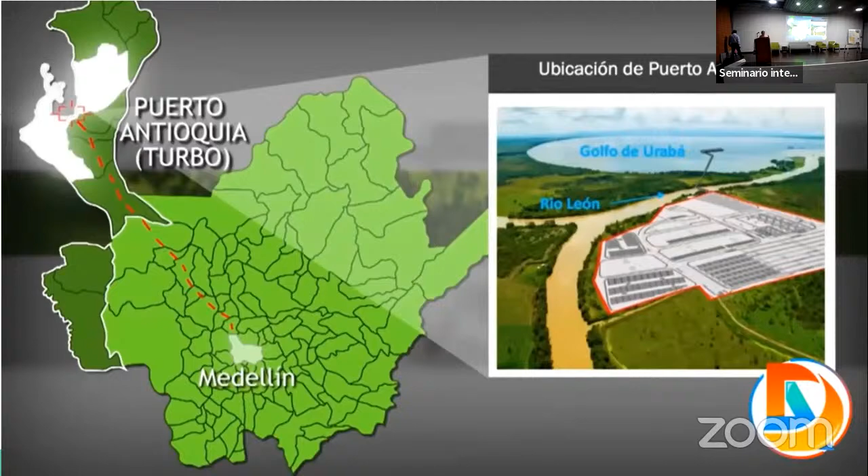Continuing with the location of Medellín, the Aburrá Valley. This is Antioquia, this is the Aburrá Valley.

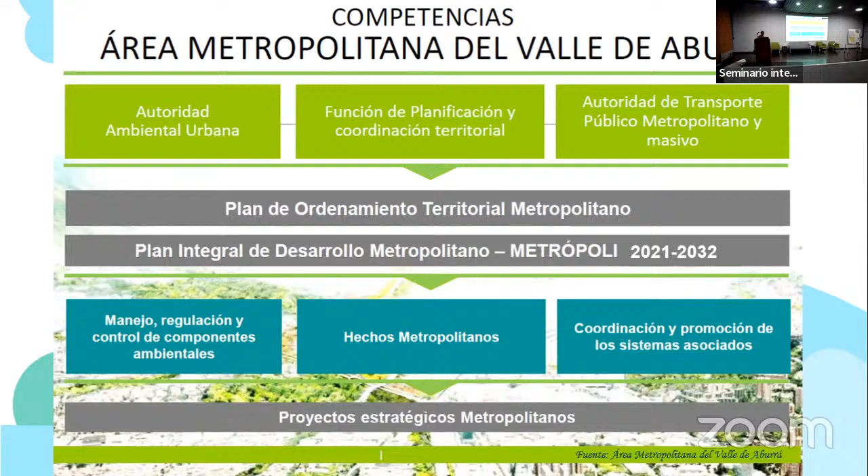The metropolitan area is also responsible for formulating strategic metropolitan projects such as the lines of Metro Medellín, which operates across different municipalities, with communication between different buildings and airports. The localization of Medellín and its metropolitan area is between different valleys.

We find the Cauca Valley in the west of the department, with an approximate altitude of 500 meters above sea level; the Aburrá Valley with an approximate altitude of 1,600 meters above sea level; and the San Nicolás Valley to the east with an average altitude of 2,000 meters above sea level.

An important fact here is that the Aburrá Valley spans only about 7 kilometers wide in the municipality of Medellín. They have the urban zone, suburban zone, and rural zone.

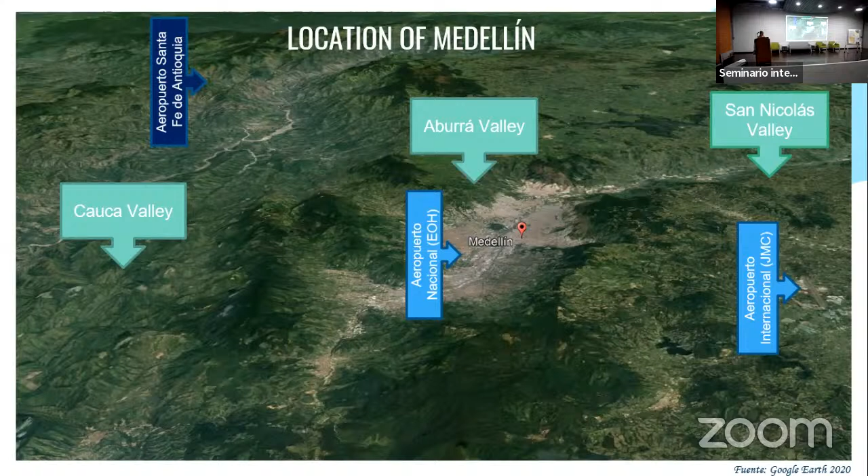In 1921, migration began from the rural area of Santa Fe de Antioquia, in the west, to what would become the new capital of the department of Antioquia, named Medellín. At that time, the population was approximately 90,000 inhabitants.

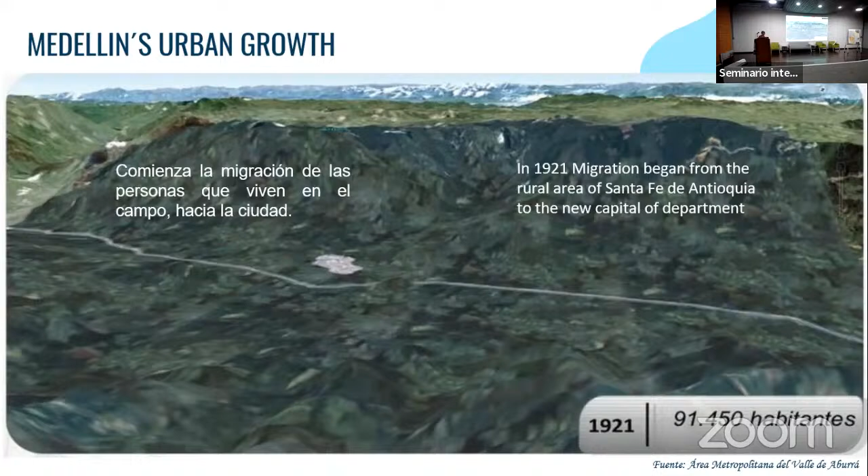In 1945, there was indiscriminate and unplanned growth due to the establishment of industry, increasing the population to approximately 270,000 inhabitants.

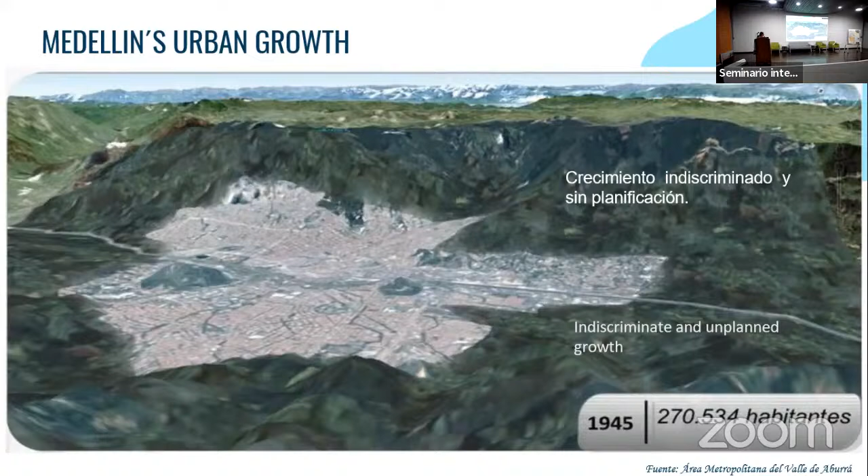In 1981, the population of Medellín had grown to approximately 1 million people, making it a sprawling city. In 1985, construction of Metro de Medellín began.

The first metro line was inaugurated in 1996, followed by the second line, which supports mobility in the western part of the city.

An interesting fact is that the metro system in Medellín is elevated, at ground level, because when construction began in 1985, Colombia was experiencing the drug trafficking war. If you know the story, you know who Pablo Escobar was, known as El Patrón. At the time, one of his tactics was to place bombs in the city. The system planners thought that if a bomb were placed in an underground system, it would be harder to evacuate or provide aid compared to an elevated system.

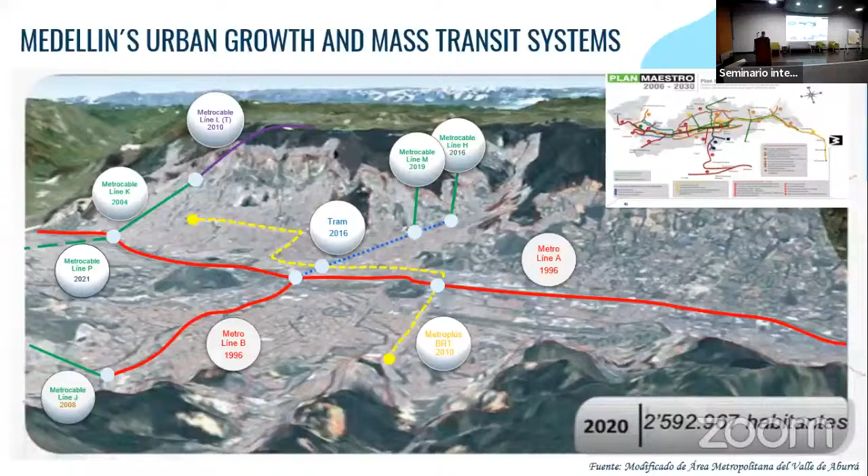The master plan for the metro system projects from 2006 to 2030, with many other projects planned for the future to improve sustainable mobility, reduce the use of private vehicles, decrease CO2 emissions, combat global warming, and improve air quality conditions. This is documented in another plan, Bio 2030.

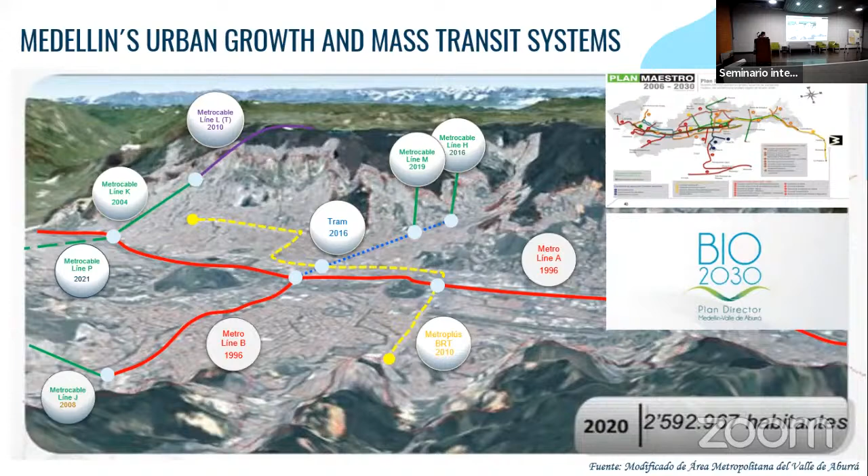The Medellín metro system transports 850,000 people daily, and the integrated system, Sistema Integrado de Transporte del Valle de Aburrá (SITVA), transports more than 1.2 million people daily.

The metropolitan area is divided into zones served by intermunicipal public transport routes. These routes are identified by different colors, each associated with the zone from which the population is transported, helping people take the correct routes according to their location. These vehicles are small, around 40 passengers, due to the road conditions and high slopes.

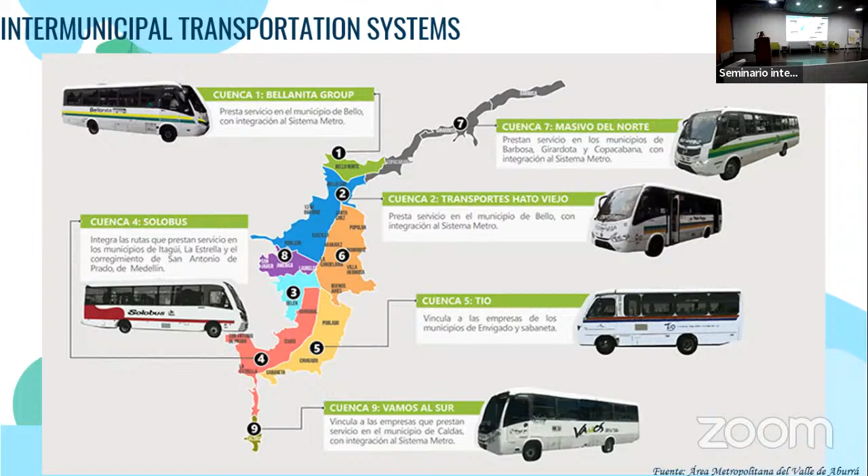Medellín and the metro system have saved more than 2.9 trillion pesos annually, equivalent to $900 million, by reducing pollution emissions, approximately 620,000 tons of CO2, in addition to fuel savings and reduced road incidents. In Medellín, 200 people die annually in traffic accidents. Similarly, users save approximately 130 minutes in travel time each year.

Green top-ups can be made by recycling plastic bottles at metro system stations. This initiative was started by university students in 2018. Up to 18 bottles per day can be recycled per person. This prevents approximately 5 tons of CO2 from being emitted into the atmosphere, equivalent to removing thousands of vehicles from circulation in a year.

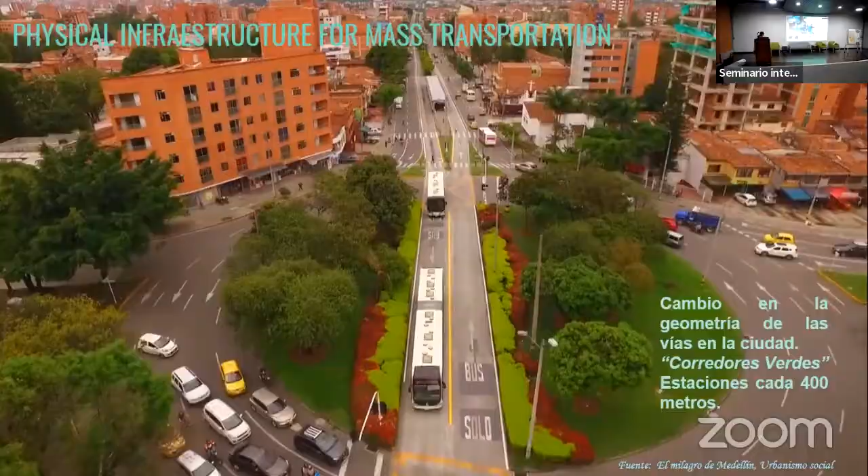The EnCicla system is a system of public and free bicycles offered in the various municipalities of the Aburrá Valley metropolitan area. This system has allowed the population to save money and move more sustainably, avoiding CO2 emissions.

The service is entirely free with prior registration. It has 83,000 active users, of which 21% are women and 79% are men. 70% of users are low income, while 30% are high income.

The system began operating in 2011 with 105 vehicles and 6 stations. It has both automatic and manual stations, like you can see here, station, automatic station and manual station.

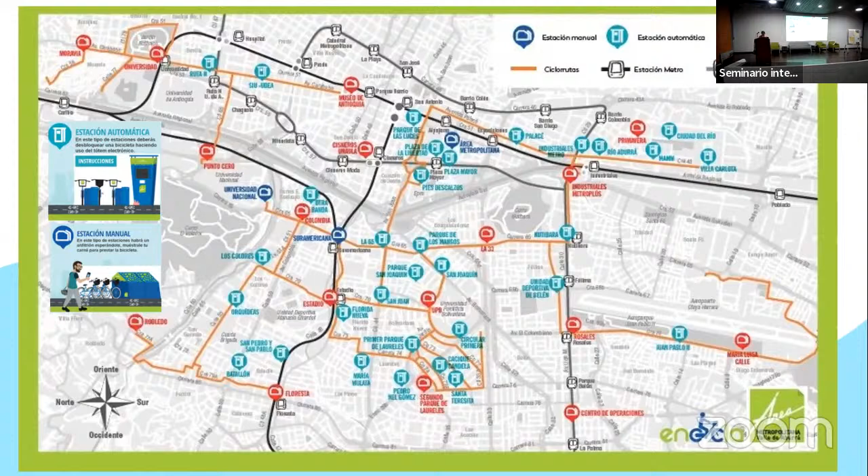The AMVA has a metropolitan bicycle master plan for the Aburrá Valley, called PMB 2030, which must be used by the different traffic and transportation authorities. In the metropolitan area of the Aburrá Valley, the average bicycle trip time is 23 minutes on low slope roads, with an average distance of 2 kilometers.

In Medellin, there are green taxis, meaning electric taxis that don't pollute the city. This is an advantage for sustainable mobility and CO2 reduction. Currently, there are 43 charging stations in the city of Medellin.

Recently, the Parques del Río project has been undertaken, which is an initiative by the metropolitan area to reclaim public space by burying vehicle roads and creating green pedestrian areas for the community. Where vehicles once circulated, people now walk. Before, in 2015, and after in 2020. This connects different points in the city along the Medellin River. The main idea is for this project to extend along the Medellin River into the various municipalities of the Aburrá Valley.

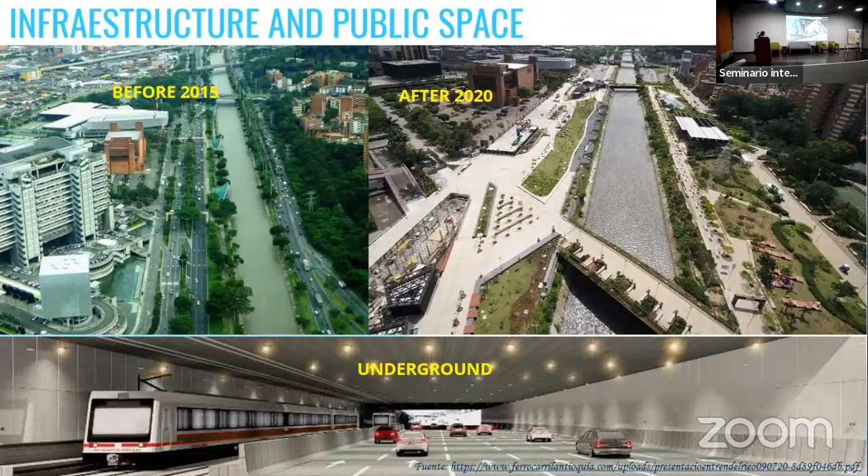In one of the most densely populated areas of Medellin, this is Comuna 13, the well-known electric escalators, I don't know if you know these ones. Electric escalators were installed, improving mobility for people in the area, including those with physical disabilities. These escalators replaced 315 concrete steps, contributing to sustainable mobility. Approximately 12,000 people use these escalators daily.

Additionally, space for children, restaurants, recreational areas, and tourism have been developed in what was once a socially problematic area, now transformed through resilience. There is a saying that every great public space should be a space for the small public, the children.

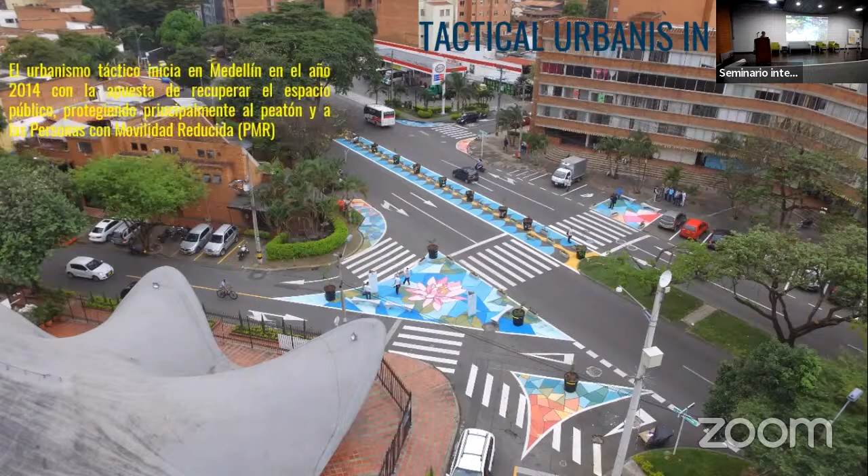Tactical urbanism in Medellin began in 2014 with interventions in various areas of the city, promoting pedestrian and cyclist mobility. Medellin created a guidebook, this one, to ensure that city planners include this cost-effective and impactful intervention in their projects. This is in the Laureles zone.

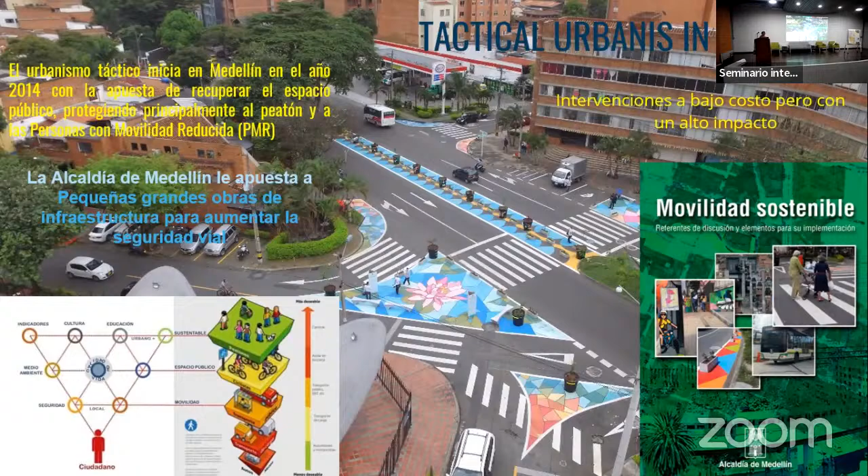At the University of Antioquia, events on sustainable mobility have been held promoting systems such as electric vehicles developed by the students themselves. In 2018, the first electric vehicle race took place with participation from over 22 universities across the country. The first competition was held on the University of Antioquia campus, and these events have since rotated among universities nationwide. In this way, the university also contributes through planning and research into new ways of inhabiting the territory and moving around in a more sustainable manner.

This is my students here, and this is the electric vehicle that he created.

And finally, can you help me with the video, please?

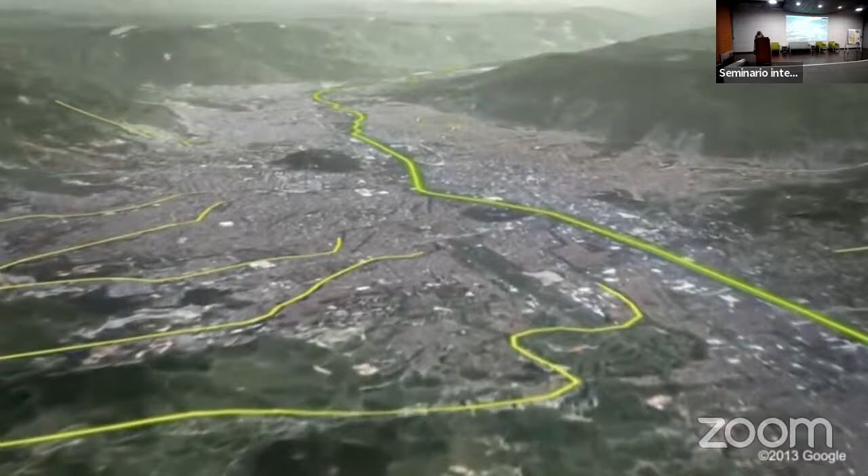Enclosed by the Andes' challenging geography and a rich, biodiverse environment between connections of water, energy, and transportation is the city of Medellin. At the new north of the metropolis, the Medellin Innovation District has been designed to become the center of a major transformation and boost innovation throughout.

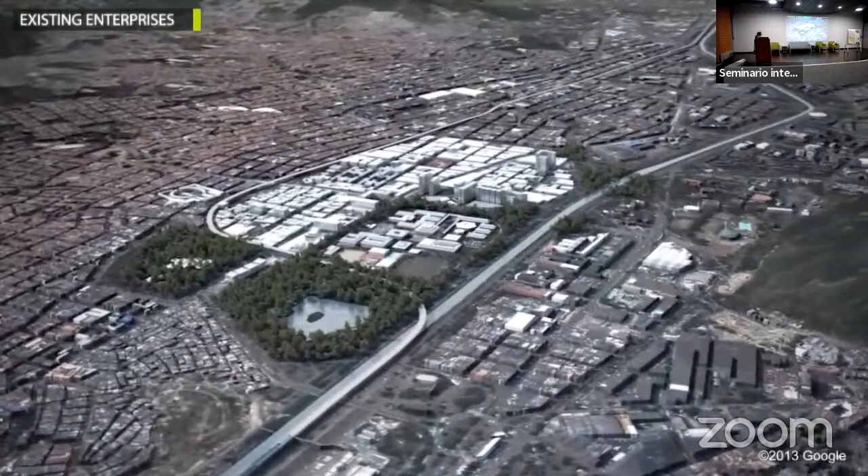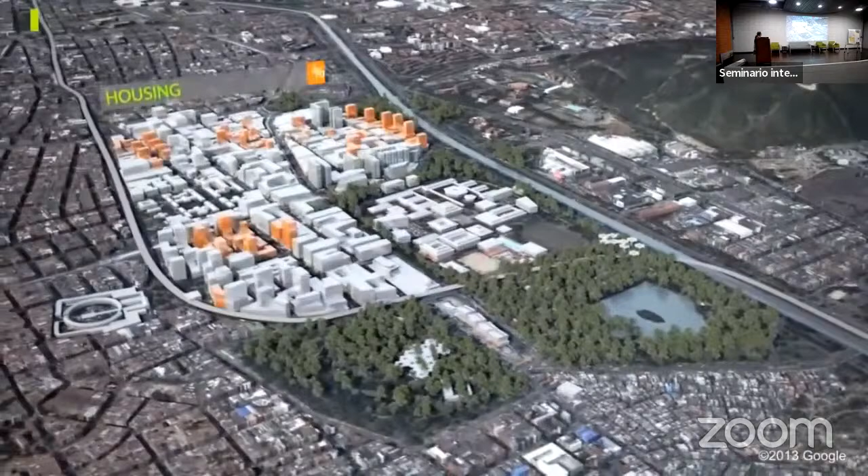Connecting the energy of existing enterprises, led by Ruta N, the district incrementally grows over a period of 10 years through a sustainable mix of uses that generate social capital.

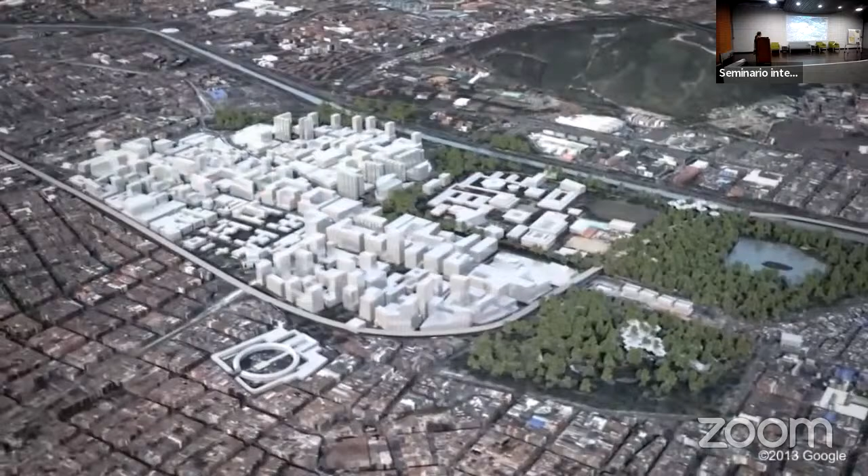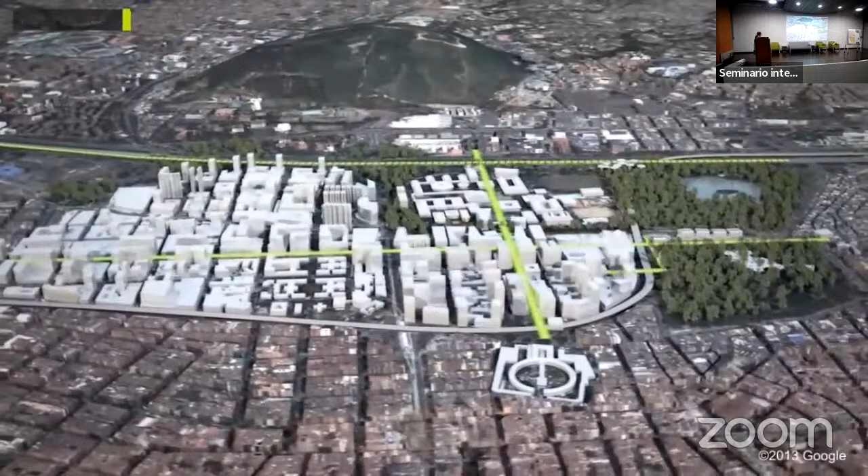The East-West Innovation Axis and Carabobo connect the district to Moravia and downtown Medellin through pedestrian mobility solutions that focus around the needs of a new, human-scale lifestyle, and public spaces enhanced by digital technologies.

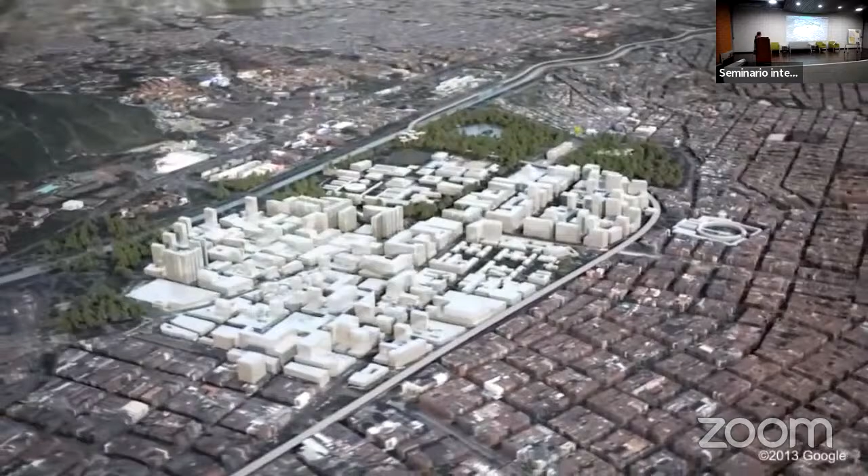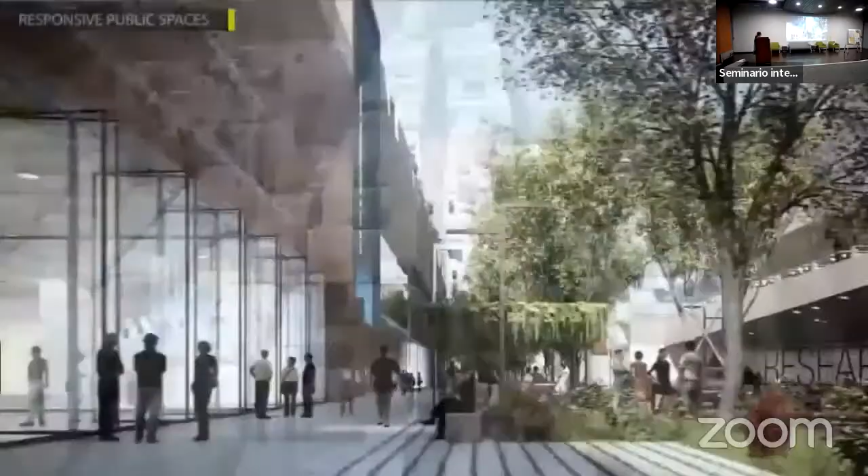With a sprawl of biodiversity throughout the district, inspired by the city's botanical garden, Carabobo unfolds north-south its unique Latin appeal, surrounded by the presence of corporate research facilities and public amenities, in a green and digital environment.

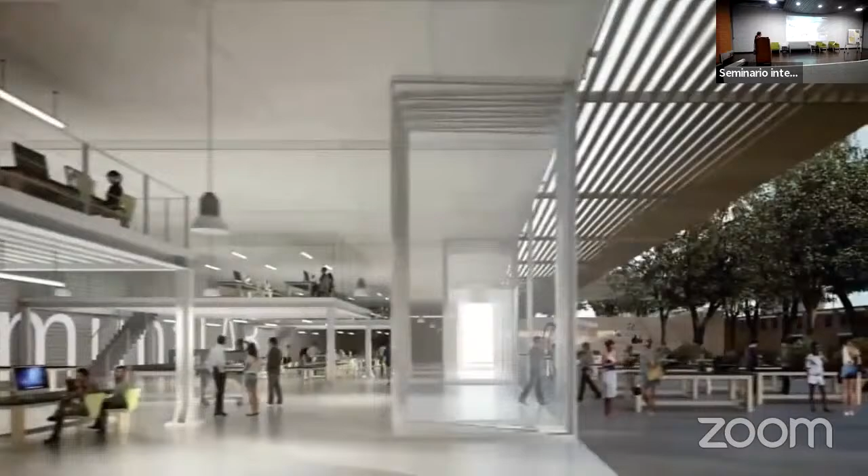Hubs of digital production spread within the traditional neighborhoods of Chagualo and Jesus Nazareno, tying together living and working through Medellin's characteristic architecture of indoor-outdoor spaces.

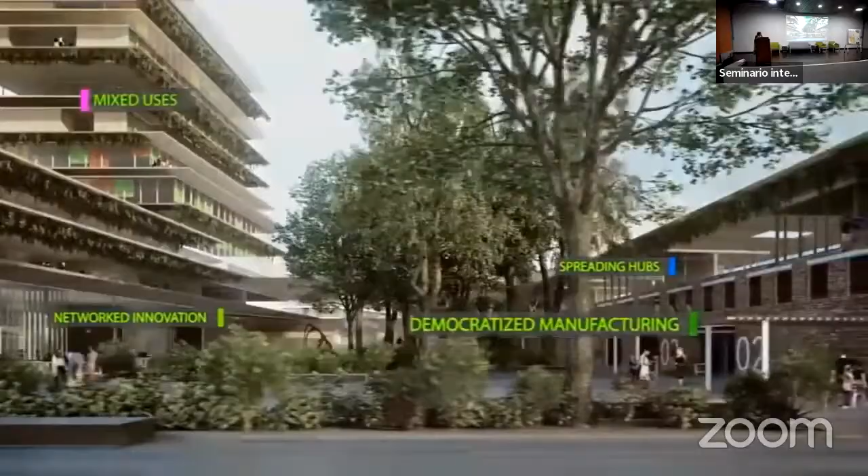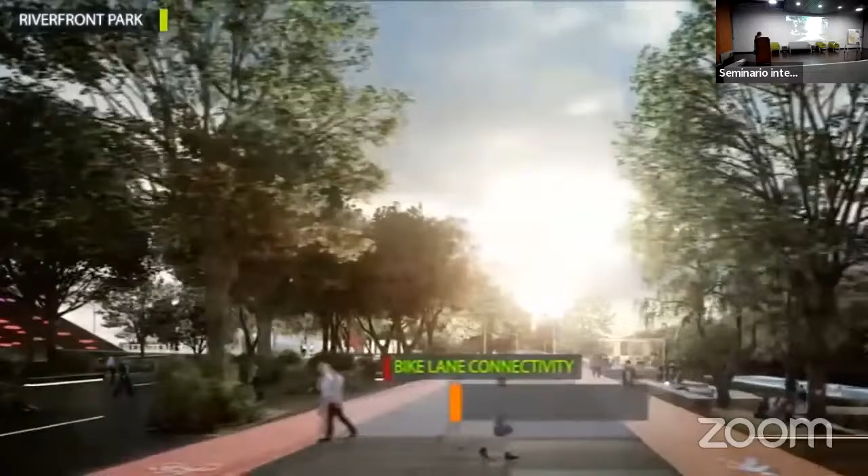The new Riverfront Park, next to the University of Antioquia, becomes the playground for the neighborhood's diverse and inclusive social milieu, connecting the district back to the Medellin River and back to nature.

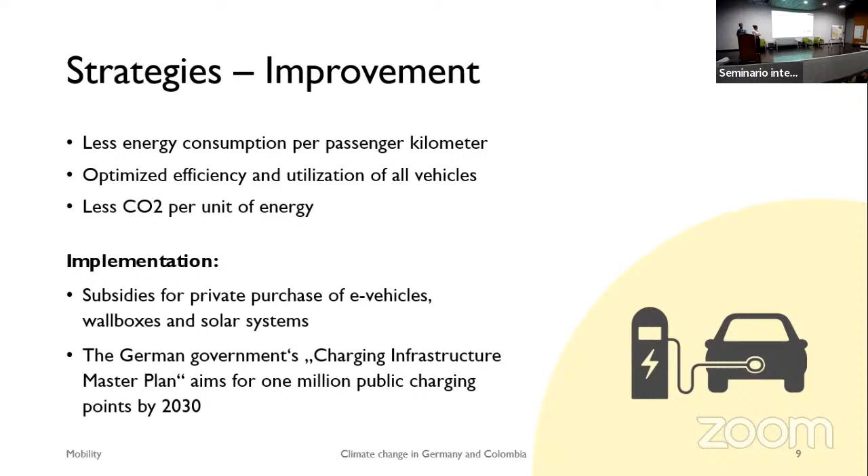In Germany, for about four years now, we have the Deutschland ticket, a nationwide public transport ticket for 49 euros per month. This ticket allows unlimited travel on regional trains, buses, and trams across Germany. As of now, around 10 million people are using this ticket, making public transport more accessible and affordable. This is part of Germany's strategy to reduce cars in general and promote a greener travel lifestyle.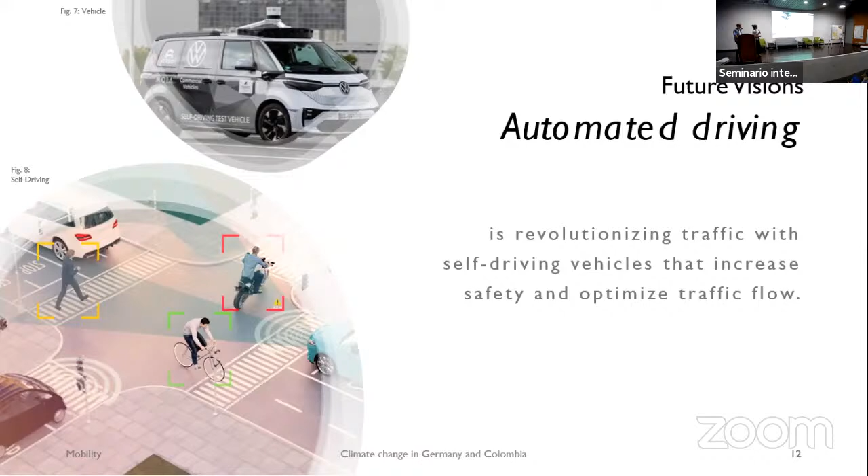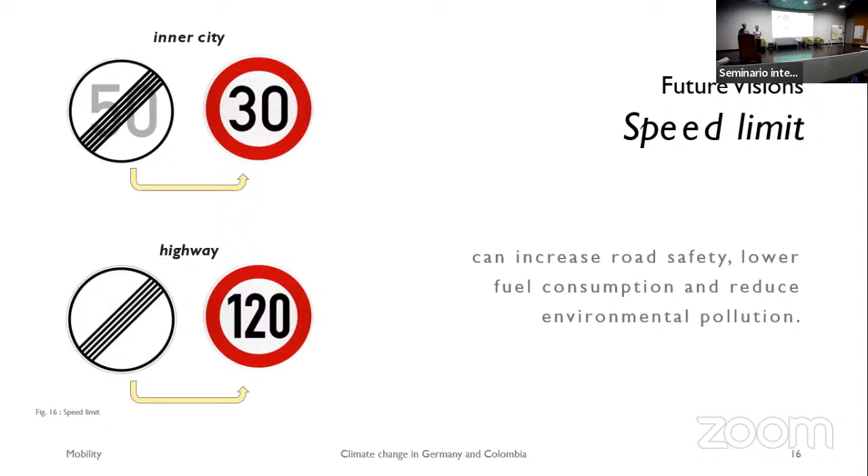The next strategy is the impact of speed limits. It's a simple measure—speed limits can have a big impact on road safety and also the environment. In Germany, some parts of the Autobahn, the German highway, have no limits, and there are always discussions about speed limits. Some political parties suggest setting a limit of 120 kilometers per hour, and inside cities, from 50 down to 30 kilometers. Maybe that's not new, but it's in discussion right now.

The next future vision is about toll systems. We learned yesterday the pico y placa principle here. It's totally new for us, since we don't have toll systems in Germany. They can manage traffic efficiently and are, I think, key goals for sustainable cities. It can also help finance other more eco-friendly improvements, like the German railway, where we really need money.

Another thing we have in Germany is environmental zones, called Umweltzone. Only environmentally friendly vehicles are allowed in these areas, mostly in the city center, and it helps to reduce urban pollution and traffic.

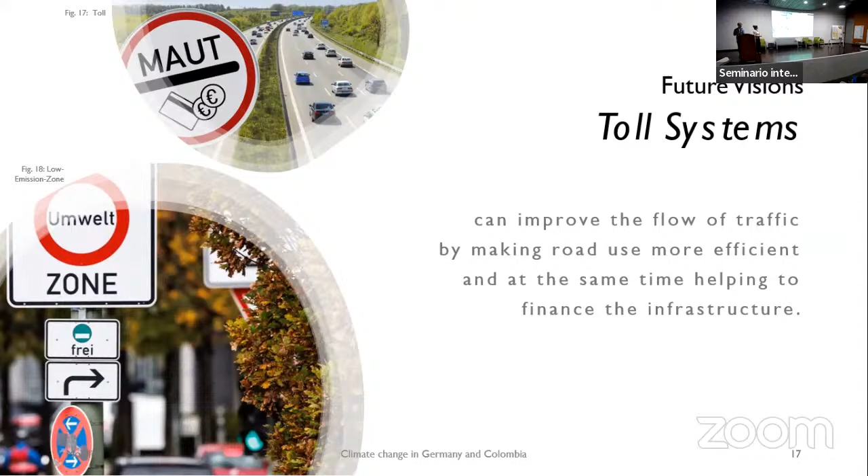The last future vision we want to present is public pop-up bike lanes and bicycle highways. Cities around the world are experimenting with new ways to promote cycling as a safe and sustainable mode of transport. During the COVID-19 pandemic, Berlin quickly introduced temporary bike lanes to accommodate the surge in cycling as people avoided public transport. These pop-up lanes were designed to provide more space for cyclists and encourage people to use bikes instead of cars. However, as traffic returns to pre-pandemic levels, some of these lanes are being removed or converted back to car lanes. It's a sparking debate about the future of urban mobility and how we build tracks and bike lanes.

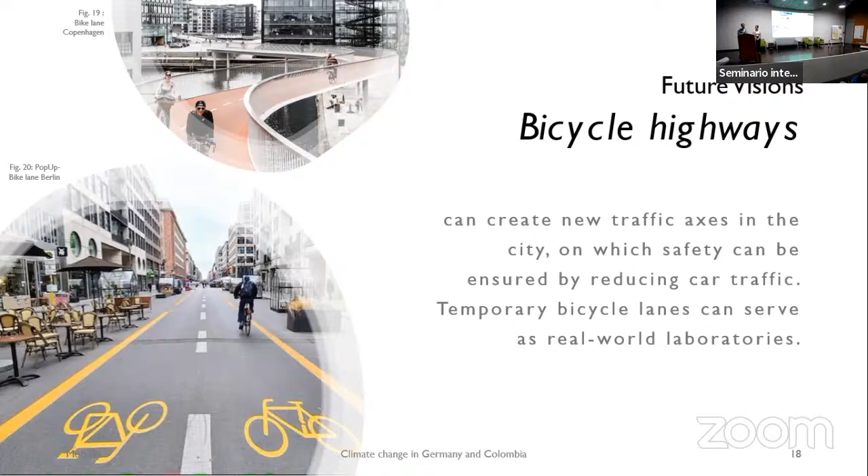A good example in Europe is Copenhagen. It's a leading example of a bike-friendly city, showcasing the potential of cities of tomorrow.

For our best practice examples, we want to present the terms innovation and exnovation first, because in the mobility transformation, the Wuppertal Institute, an institute for transformation science, has used these terms to talk about ways of changing. Innovation refers to the development of new products and new technologies, while exnovation means phasing out outdated and environmentally harmful technologies, for example phasing out fossil fuels and changing to other solutions. So we have these two kinds of development, and now we want to present one innovation, one new technology, and one exnovation as best practice.

The innovation project we want to present is called HEAT, which stands for Hamburg Electric Autonomous Transportation. It's a project currently testing autonomous shuttle buses in the HafenCity district in Hamburg. They aim to cover the last part of your journey in local public transport and increase connectivity and convenience for passengers. By using electric cars, the project contributes to reducing emissions and supports the friendliness of urban transportation.

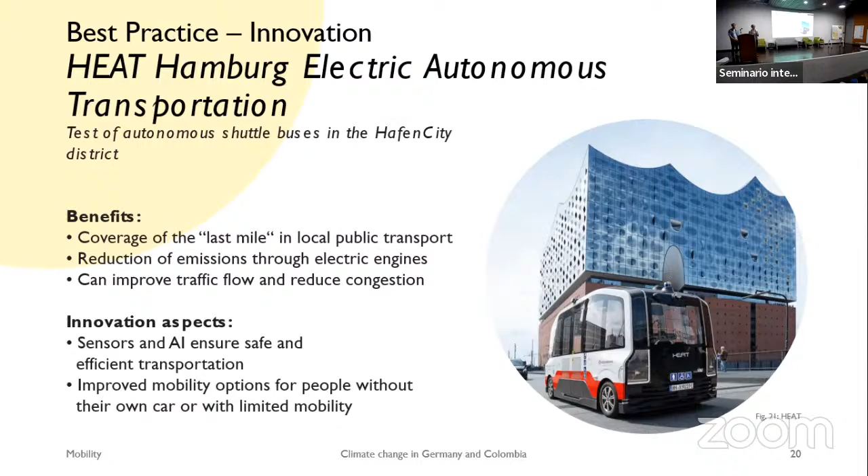Let's come to our second example, the exnovation project, which can transform urban spaces and improve the quality of life for cities. Sometimes in Berlin the subway runs elevated, like here, the metro. It looks like it did back in the days, and now they've changed it to a bike lane.

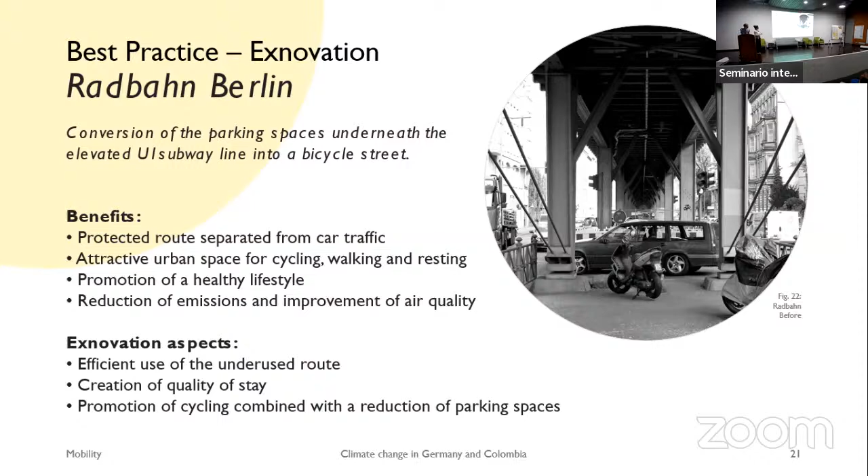The conversion of parking spaces under the U1 subway line into a bicycle street is a good example of creating new places under the subway. It provides a protected bike route separated from car traffic, creates an attractive urban space for cycling, walking, and relaxing, and can promote a healthy lifestyle and improve air quality, bringing more quality into the neighborhood overall. The exnovation aspect is that the efficient usage of empty spaces improves the quality of urban life and can promote cycling while reducing parking spaces. This project is an example of how innovative urban planning can make transportation more sustainable and more helpful for the community itself.

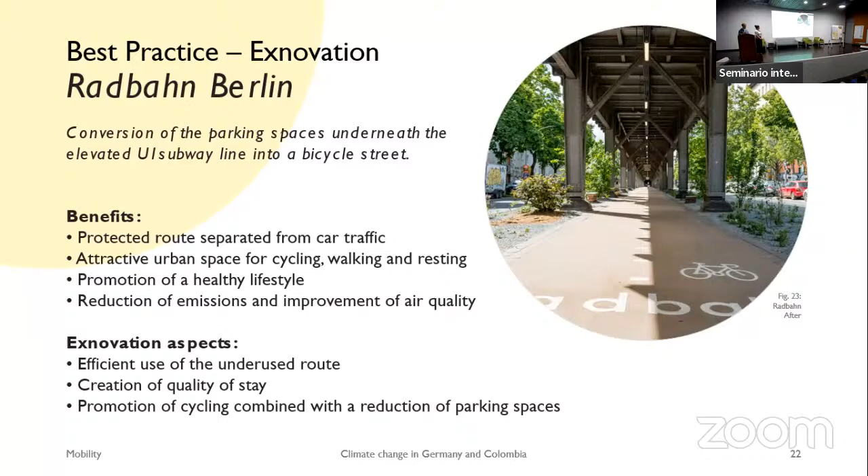Thank you. And now we have a discussion.

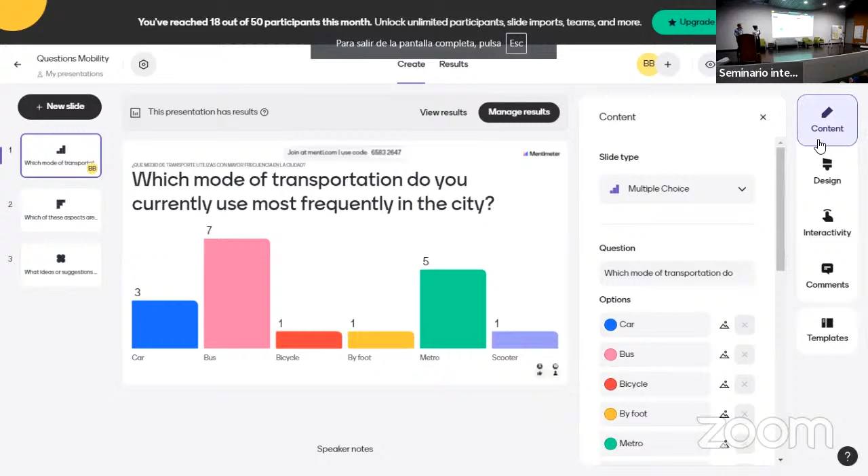It's very interesting also for us to check what kind of type of transportation you use.

So this is our first question that you just answered, obviously. And it's still changing, people are still answering, but it's really interesting to see a representation of what we just talked about today, right? Because we got presented the metro in all of the excursions, that it's a big thing in this city, and to see that it's also represented in how you guys use traffic is really interesting.

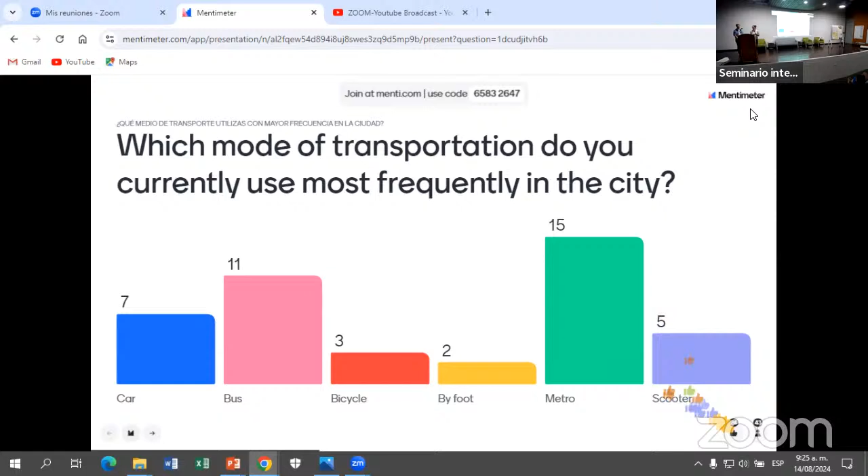It's also very interesting that there are so many people with cars. It's mostly the time during the traffic jams, and you need more time mostly, maybe. If you want, every time you can interact. And also by foot seems to not be the most used transportation mode, but also Medellin is such a big city, right? So that's probably not easy to walk everywhere. Okay, a second.

It's a little bit sad, guys. It's a race. What wins?

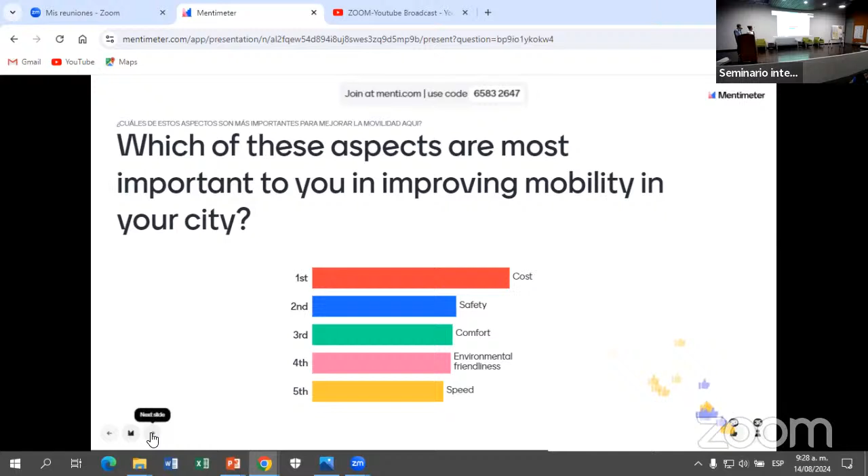Then we have this more open question. We talked about a lot of suggestions and ideas already, but what feels like the most important change that needs to be done? This will create a word cloud, so maybe that's a nice end of this topic. You can also type in Spanish, but maybe someone needs to help us.